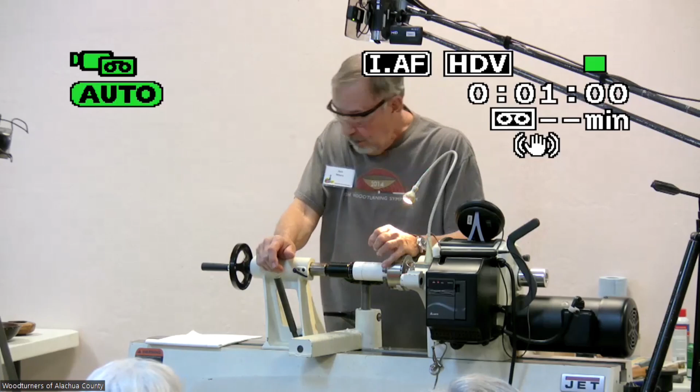All right, we're going to attempt to do some threading tonight. And I'm going to start off by talking to you. When we go to threading wood, it presents some particular challenges for us. There are basically two ways to do it. One of them is with a threader. This happens to be a Bonnie Klein threader, okay?

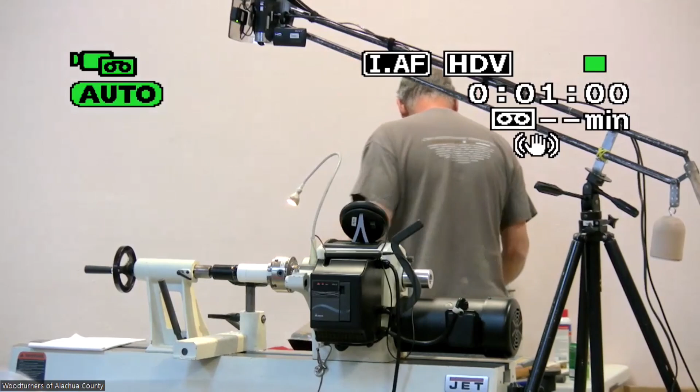And the way it works is it locks here into your banjo, your chuck, which is part right here, goes on here with your piece already turned. It advances here. You dial in your adjustment right there. Also, that's Bonnie Klein. I don't think Bonnie makes those anymore.

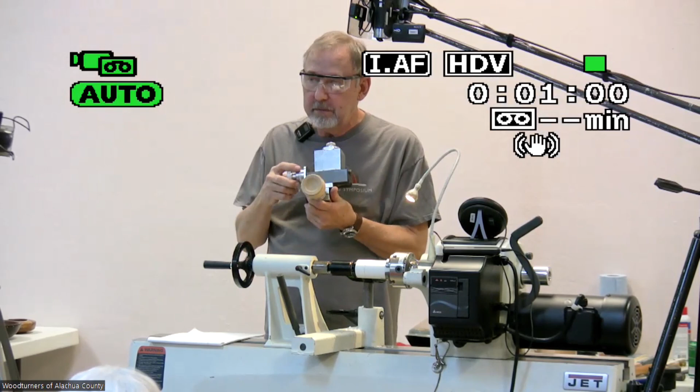This is a Baxter threading jig, which is the one that Don uses. And it's basically the same thing, except Don's got it designed so it sits on a bed lathe. So his is actually a little bit more advanced because he doesn't have to set his up once it's set up like you do. So I'll come back in a minute and explain my personal pros and cons to that way. If you're going to hand thread it, you're going to have the opportunity to buy some more tools. Okay.

It consists of 3 tools. It consists of an inside chaser or a female thread cutter, an outside cutter or male thread cutter, and a relief tool. Okay, and I'll show you how this relief tool works when we get there. My personal thoughts on, well, let me cover these again here. These come in different, as do the jig threaders, these come in different TPI or threads per inch.

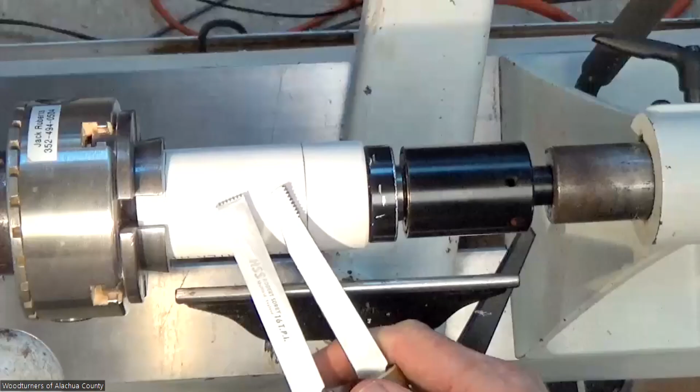Okay, this happens to be a 16. That is probably the most popular. It also comes in a 20. These are 16. Okay. There's also a 20. The 20 is used for really small things like Don showed you these acorn things. Lee Sky makes them about that big, but you can't get a jig threader to go in because it's too small. The cutter bit won't go in.

So, and they also come in either a 12. I've seen 12s and I've seen 10s, and that's generally for big urns or big vessels of some type where you want a big thread. This is the first time I've done this, so I'm going to have to read some notes here. These particular tools are made by Robert Sorby. Okay, they're about, I don't know, $90. This other tool here is homemade. You can buy one from them, and they'll probably sell it to you for about $40, or you can just make one yourself. It's pretty simple.

If you go with a jig type threader, if you can find one used, you're going to pay about $350 for it. If you buy it new, it's going to be between $500 and $600, and that's not all of it. You also have to have a cutter bit that goes into your lathe, and that cutter bit's about $60, and then you got to have a collet system to hold that cutter bit. And what's a collet system? $100, somewhere in that area. So you're going to spend $700 or $800 to do it the other way.

So my pros for the jig threader is that you can turn most all wood with it. You can cut threads in most everything, which you can't do by hand. And we'll see that a little while later. Your success rate with a mechanical threader is generally pretty good from the beginning. Small learning curve, and you're good to go. My objections to them are number one, they're expensive, and I just told you about what they cost. And number two, in most cases, you got a cutter bit. Yeah, well, they're sharp. We won't pass it around.

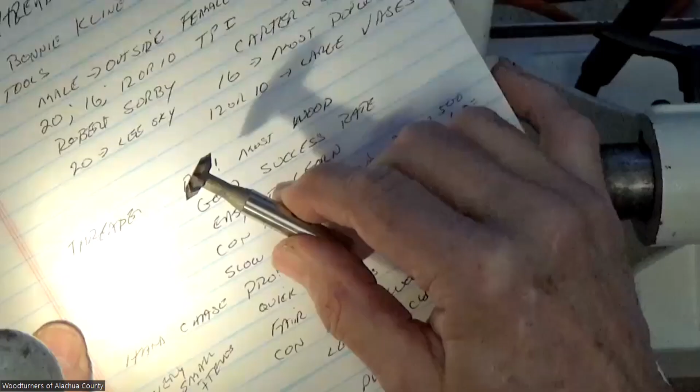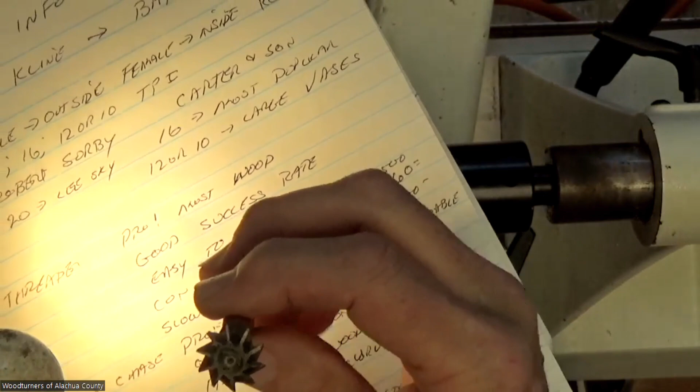Can you go to the overhead? This is your cutter bit. It's a high-speed steel or carbide, depending on what you get. It goes into a collet system, okay? And part of the problem is it's really designed to turn at about 10,000 RPMs, and your lathe's only going to go to about 3,600. So you have to cut really slow with it, or it boogers it up. Thank you, Don. Yeah, router. Yeah, and it cuts a lot better at that speed.

So the things that I have against the threader machines is that they're expensive, obviously. And in Don's case, he's got his problem solved. But in my case, I have to set it all up every time I want to use it. And I set it up on the lathe, and the lathe turns slow.

So sometimes I get a fuzzy thread out of it. And my success rate, I'm sure his is much better than mine, simply because he's got it set up on a router, and it's a router bit.

So if you go to hand chasing, the advantage to them is they're inexpensive. You can get everything you need for about $100. They're quick to set up because they're already set up, ready to go. Your success rate after you learn to use them is fair. I won't say it's absolutely great, because you can get what I call a crumbling thread, which we'll go over a little later. And the bad part about them is it's like a skew. There is a learning curve. And if you're not willing to take on that learning curve, you're not going to be successful with it.

Now, he came up to my house before I even knew him and said, I want to learn how to turn threads. And we sat down, and in about 3 hours, I guess, I had him turn a beautiful thread. Now he's gone home. He tells me he doesn't remember how to do it. I'm glad I didn't teach him how to use a skew. But the learning curve is kind of rough, and we'll see it up here.

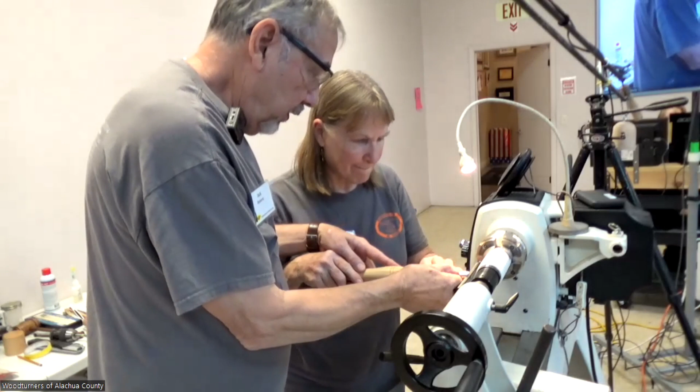Yeah, you're really slow. That's okay. So now I want you to imagine that you're trying to speed up just a little bit, and you're a terrible driver. So when you come down here and you go into turn one and you go into turn two, you're kind of fishtailing and your tool's coming around like that, and then you're straightening up going after there. So it's going to be kind of like this.

Okay. So the same thing. On the third, somewhere in the middle. It doesn't matter. You're going to square it back up. You're going to touch the wall right there with your back end of your NASCAR, and then you're going to straighten it back out. You're riding right down the edge of the wall.

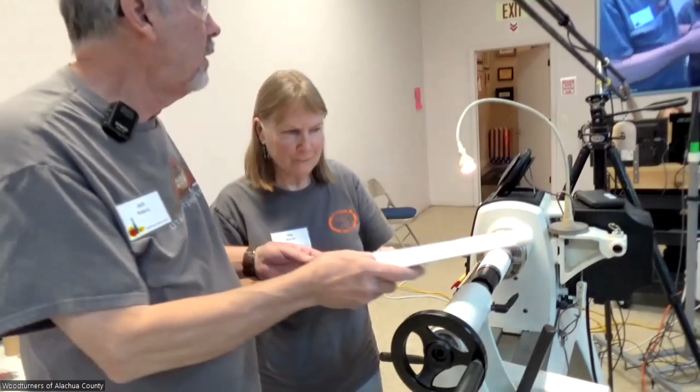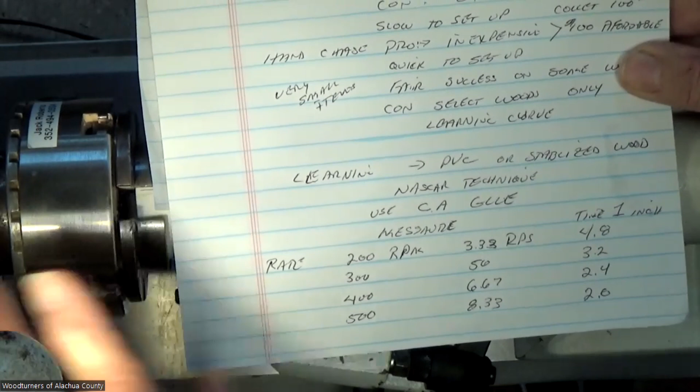Okay, now let me show you something. We on the overhead? Rita was taking about 3 seconds to do that. In my mind, I was timing her. If I turn this lathe on, the proper speed for cutting threads is somewhere between 200 and 500 RPMs. And if you go to YouTube and you watch 4 or 5 of these things, some of these guys cut at 250 and some of these guys cut at 450. The speed you want is the speed that works for you.

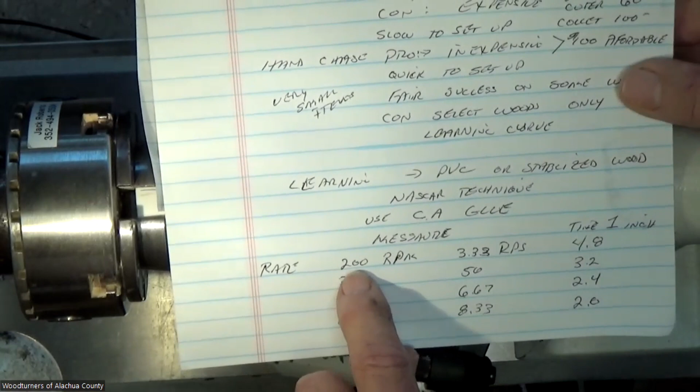Now, Rita will get faster later, but right now she's turning pretty slow. There's a problem with turning at the lower speed around 200, and I'll tell you about that in a minute. If I were to turn this lathe at 16 revolutions per minute, there's 16 teeth in this tool. It would take 1 minute for this tool to go from here all the way to that line right there. That's 1 inch. That's the reason I told her to go to that line. So that would take a full minute at 16 RPMs. We're going to change revolutions per minute to seconds, okay?

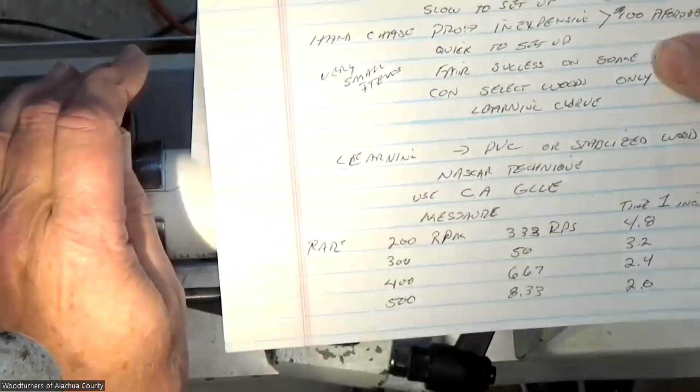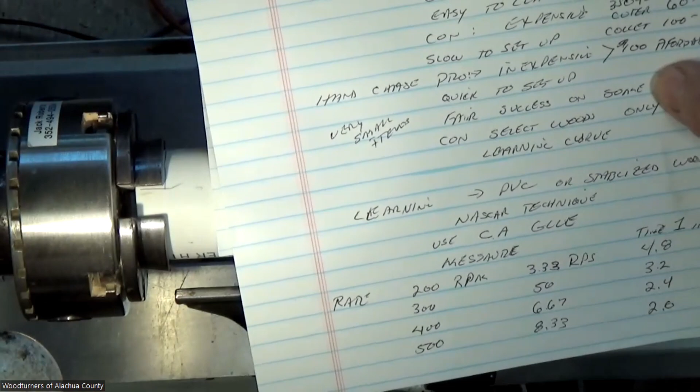So if this lathe is turning, and these numbers really don't matter, I just want you to know where they come from. At 200, that's going to take her almost 5 seconds to go that 1 inch with this tool. That introduces a problem called a drunken thread. You don't get it flowing all the way down. It stops and starts like this. And if you cut one, you'll feel it. You'll feel the tool pulsate when you go through the wood.

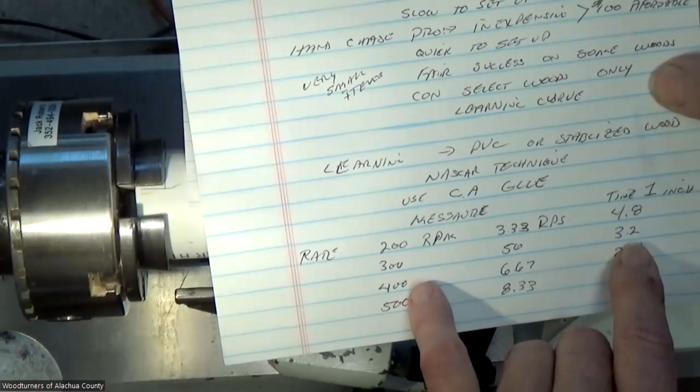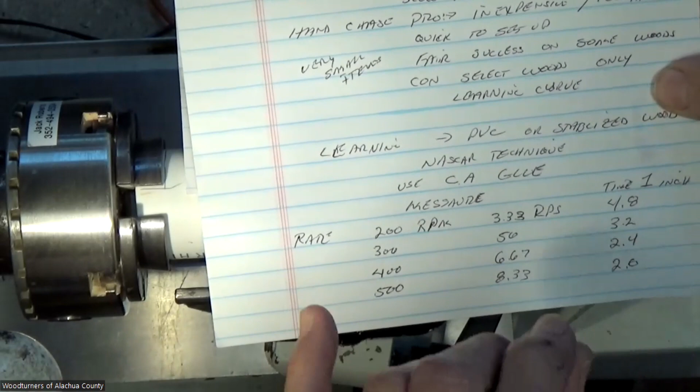You jump it up to about 300 RPMs, and now you're talking about 3.2 seconds. That's about where Rita's at. She's taking about 3 seconds to go down there. So 300 RPMs, maybe just under, would be a good RPM for her to start to learn on. If you get up to about 400, it takes about 2.4 seconds. I turn between 350 and 400. That's the speed I turn at. If you get up around 500, I think you're a little too fast, personally, but I've seen people do it, especially on short threads.

Now, what she's going to turn and what we're going to turn tonight is going to be much harder than turning a lid for a box. And I'll explain this to you now before she tries this. If you go to your pantry, and everybody's got to vote on this now, I want to see some hands. If you grab a jar out of your pantry, whether it's pickles or relish or mayonnaise, and you screw the top off, how many people think this top comes off in 1 turn or less, 360 degrees or less? Raise your hand. I got 3 people, 4 people.

If you think it comes off in 1 to 2 turns, raise your hand. Okay. If you think it comes off in 2 to 3 turns, raise your hand. Does anybody think it takes more than 3 turns? Three-quarters of a turn. 3/4 of a turn. What that means is, to be successful, you notice Don said he had too many, you had to turn the lid off. To be successful, all you got to do is be able to cut 3 threads. Just 3 threads. It'll work like a champ.

Now this is also a little long. It takes 1 1/4 turns to get this lid off. But you look at it, there's 2 threads on the bottom. Now there's more on the top, but there's 2 threads on the bottom.

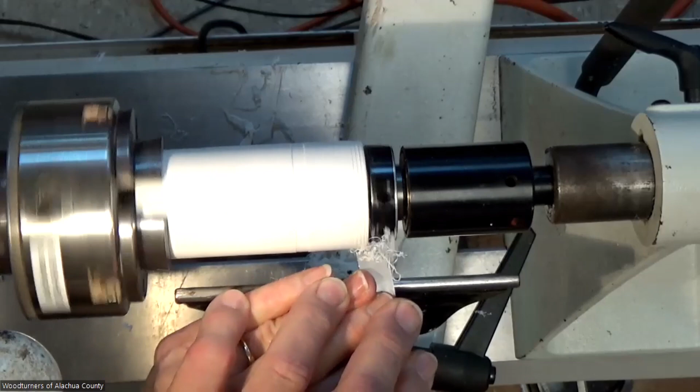All right. Slow it back down. I'm going to give you 275 RPMs. Here's what we're going to do. We're going to start like this. Loosen up. We're going to come down here and we're just going to touch it right here. You got to keep it moving. You can't stop. All right. Now see what you did. You double cut it there because you slowed down. It's got to be one fluid motion. So let's take that off and try again.

So one fluid, don't stop. You got to have the same speed all the way down. Once you get started, very light pressure. Once you get started, it will self-feed. This is the only thing I don't like about turning plastic. Makes a mess. Now that's not straight anymore, but that's okay. Watch me one time, okay?

It's a scraper. It's got to be up. You need to be moving when you touch it. It needs to already be in motion when you touch it. Easy, easy. You're pushing too hard. There you go. Yeah, keep running. Don't let it come on down. All right, let's stop it there. There you go, your first thread. Wow.

Thank you, Rita. That is the technique to get started. It's one fluid motion. Think of it as a racetrack as you go in, and all you're going to do is touch the tool in. Now we're going to go to a piece of wood, and you'll see some of the challenges that come up with wood that don't come up with plastic. Yes, sir. Would it help if you started with something that was already threaded and followed through? You need to learn to track. Yeah, probably. That wouldn't hurt to get that motion started.

The hardest part was that very beginning, when you first start. It's called striking a thread. I had to remember the word, striking a thread. And once you get 2 or 3 threads on there, you're good to go. Now, if you're doing a box, you'd want to actually turn about 4 or 5 threads, because in the end, you want to get rid of those first 2 or 3 because they're usually not as good as you want when you finish.

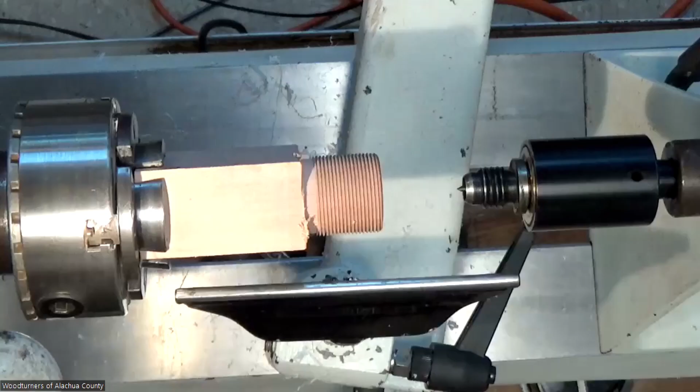So I've got a piece of dogwood here, and I practiced on it a little bit. We're going to put it in here and turn it down. Now, normally, if I were turning a box, I would do this differently. I would thread the female thread first. I would turn inside the lid first, and then I would fit the outside thread to that. The reason is because the outside thread is easier to manipulate than the inside thread.

So I would establish what my inside thread is going to be, and then I would cut my outside thread to fit it. I found when you start doing these long bolts, that doesn't work at all, actually. It's very difficult. And the reason is because the inside thread is the hard one to get correct.

And once... does somebody have a bolt back there? Somebody just tossed me one of those bolts. Just throw it up here.

If I turn this piece first and I don't get it perfect, it doesn't matter what I do down here, it'll never fit right. But if I turn this piece perfect first, I can see it. I can put a micrometer on it. I can measure it. I can make sure I don't have a drunken thread on it. And then I can turn this piece to fit this piece. And I found it's much easier to do it that way. My success rate went from 50% to like 90%.

All right. So we got a piece of wood on here. If we're going to turn the outside, we're going to turn the bolt part first. We're going to drill the nut part.

Is that box still going around? Yeah, don't worry about it.

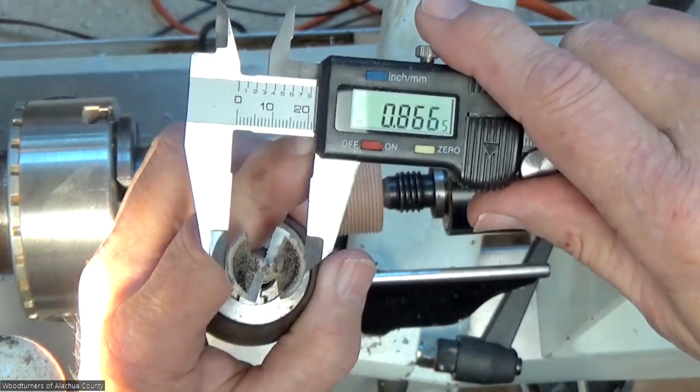So we've got our 7/8 drill bit we're going to use. And I'm going to mic it, and it should be 0.875. No, I don't think so. These drill bits Jason recommended are not very accurate. There you go. All right, so you see I have 0.866. Okay, I'm going to assume that it's actually going to be 0.875.

So what I'm going to do right here is I'm going to add to this 50 thousandths of an inch. That's going to bring me up to about 0.92 right there. Okay, that's the diameter that my bolt should be. And if I lost you, show up Saturday and I'll explain it to you again.

Okay, so we're going to turn this piece, and it has to be symmetrical. It has to be parallel. It can't go wobbly, wobbly, wobbly. It has to be true, or it's not going to thread very well. So I'm going to bring this down for that caliper to fit.

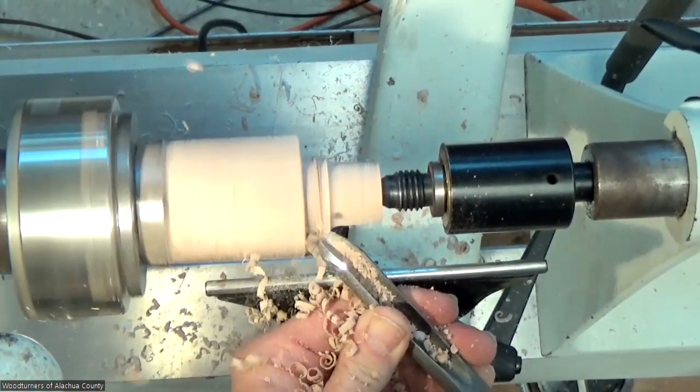And no, Paula, I'm not going to wear a shield. Paula's a safety person. But I will be careful. Frank's not going to wear a shield either. Close.

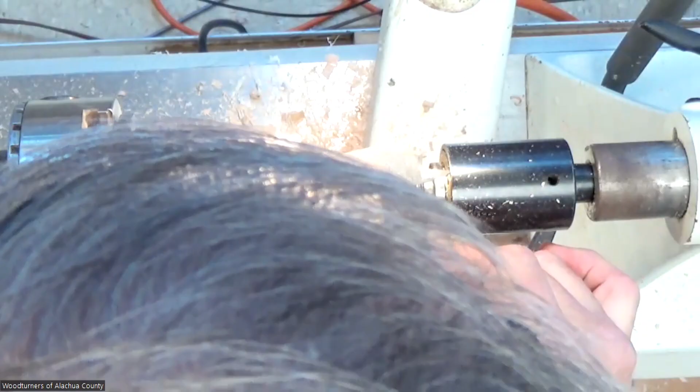All right, it gets a little bit fat right there at the end. See that? I'm good right here. A little bit right there at the very end. I'll touch that, and we'll move on. Yeah, I can. Right after I get it.

So here's my caliper set up, and there it is all the way down. Gets a little bit bigger right here at the end. Actually, it's got a hump in it right here. It's just a little bit high. So I might as well go ahead and take that out. Right here was just a little bit high.

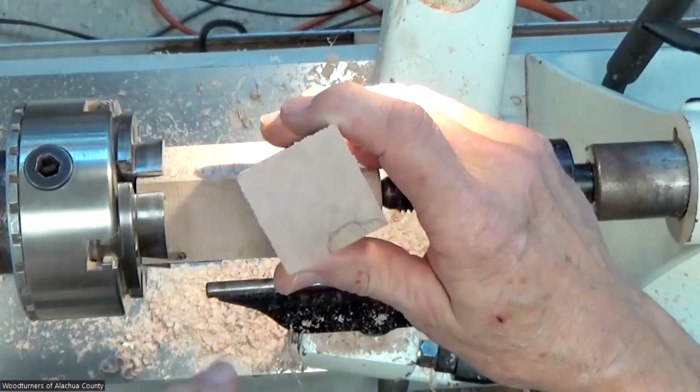All right, that should do it. We're going to thread that. Now, I'm going to attempt to thread this without using super glue. There are two things you can do. One of the problems you have is what's called a crumbling thread. And a crumbling thread happens when you're turning a piece, overhead please, and you see the grain right here. I don't know if you see that grain right here.

When you get to this side grain right here, it wants to tear it out. It's not attached to the wood where the grain is, so it wants to just peel off a chunk. And if you looked at those coming around, you saw a spot there. And if you looked on the other side, 180 degrees, there's probably a spot on the other side. Super glue helps relieve that problem as you go along. And we may need to use it. If we do, I will. Yeah. But it presents other problems too.

Okay. Part of the problem that you don't realize is that this threader that I'm fixing to use is 16 TPI. Okay. But each one of those is a triangle, so that means each side is 1/16 of an inch. So this is a scraping tool. When I stick this tool in this wood, I'm actually sticking a scraper in there that wide. Now, if you've ever stuck a 1.5-inch scraper inside of a piece of wood, you know that it has a tendency to grab things and tear them apart. And that's part of the problem.

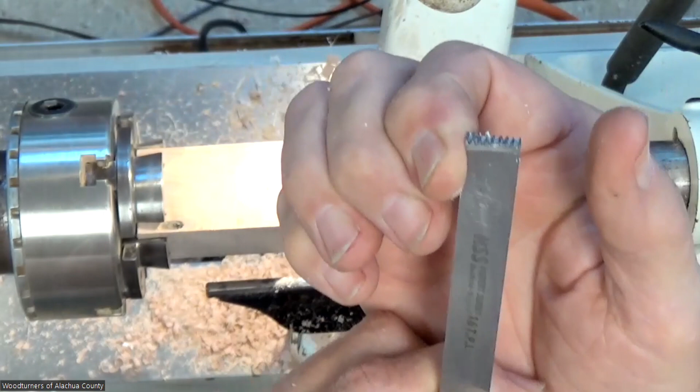So one of the things you can do is sometimes you can try a little soapy water. I did not find that worked really well for me because it wants to swell the fibers up. Some people use it. Another thing, and we may try it before we try the super glue, is some beeswax. I got a little beeswax back here in an emulsion that's softened it up. That'll help the tool slide through a little bit better.

The last thing you want to do is use super glue, and you don't want these threads to come to the same point this is. If you let them come to a point, it's going to tear them out. They're going to be threads that are kind of flat at the top. They're going to kind of look like pyramids with the top knocked off of them if you look at them through a microscope. So let's see if we can get this thing to thread. I'm going to dial this down to about, now, that's a good speed, 364, okay?

Need to raise my tool rest. The scraping tool needs to be at center or just slightly below. The handle has to be up. I'm going to do my same rotation here, and I'm going to come in here and try and strike a thread. Now, one of the things I'm doing, if you'll see this lead tooth right here when it comes in, that lead tooth is not touching. And I will not let it touch the wood until I've got a complete thread down it. Then I can let it touch. If I let it touch before I get the thread all the way to this relief, it's going to rip all these threads out. It has to stay in motion.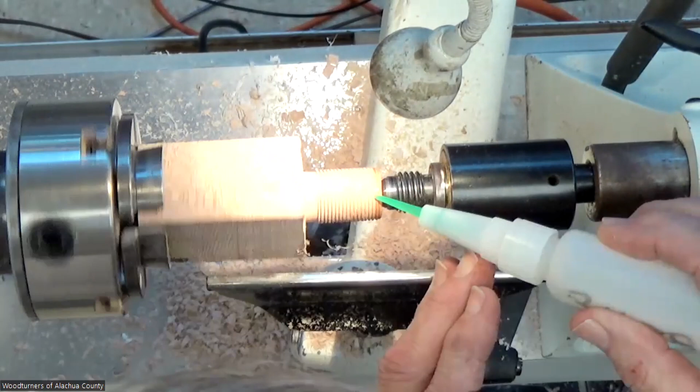I put a little super glue on it. Huh? Yeah, okay. I have to see too. This is the thin super glue. This is the 3408, which is the stuff that doesn't smell so bad.

Why do you ask me these questions?

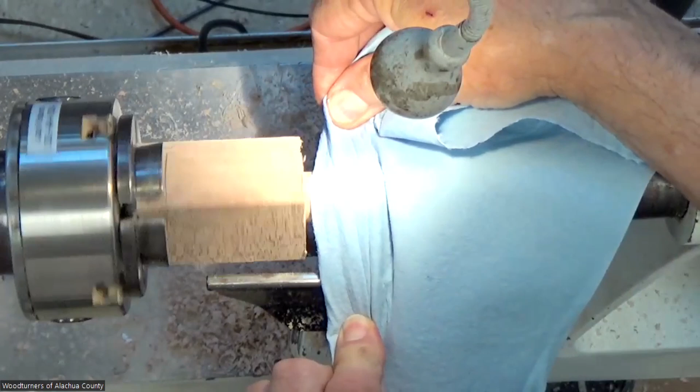You got to then wipe some of it off. If you don't wipe it off, when you hit it with accelerator, it all foams up and you got a mess. Don't wipe it off with your finger. It's great. Oh.

And we thought, oh, great. And he looks a minute and he goes with that accelerator again, and people started getting up and leaving. Now, Scott and I were stupid. We just sat there and choked. We didn't leave, but we should have. So I try to be mindful that this stuff does smell bad.

Okay, I'm coming back up to my speed again. I got about 390 on here. It's going to start turning kind of rough because it's super glue. So I want to have a really light touch. I don't want to tear anything up. So hold the tool very lightly. Please hold it down. See the super glue coming off?

If it comes off and it's not nice and flaky, like somebody just mentioned, have you a stainless steel brush and brush it off before it gets good and hard, and it'll come off really easy. All right, let's go back to cutting this. That's a pretty good looking thread. I think we can put a nut on that.

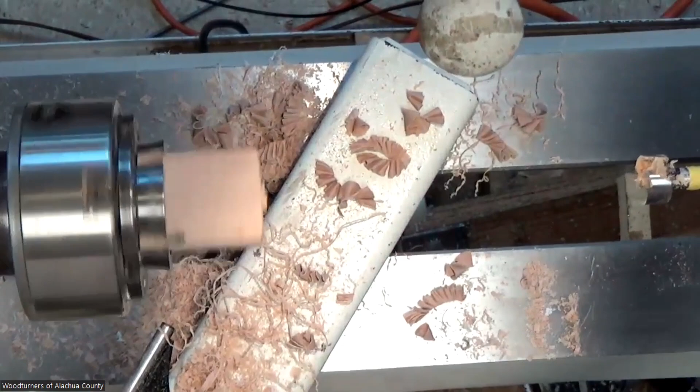I'm gonna put, that's about 3/4 of an inch. I know that because that piece of tape's on there. And that should be plenty. So we've turned our male, we threaded our male side. We're going to thread our female side. We're going to do what Don just said, only on this part. We're going to put a little chamfer right here on the edge to get the tool started. And I think the easiest thing to use is just

All right, Don, there's your edge you were talking about. It only has to be one tooth wide. Okay. All right, now, when we talked about a relief, if I go down through this hole with this female chaser, I've got to be able to get it out. If it hits the bottom of the hole, it rips out all the teeth, all the threads that I've cut. So that's what this tool does.

Where are you? Oh, go to, okay.

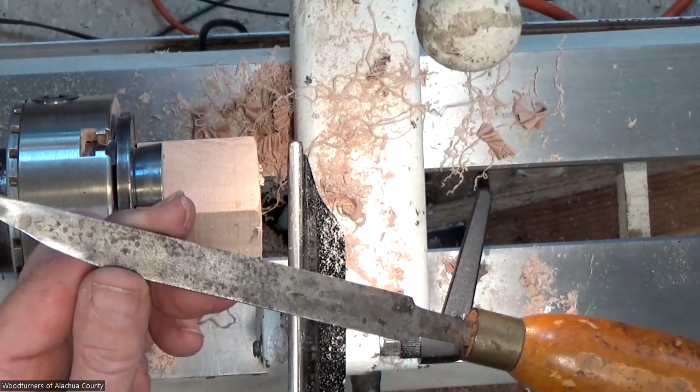That's what this tool does. It's got this little hook on the end. It was made from a scraper. If you folks ever have a chance to buy old tools like this, you know, you get them for $5 somewhere, buy them because you can turn them into decent tools to do other things with. I got a bunch of them that I've made into other things.

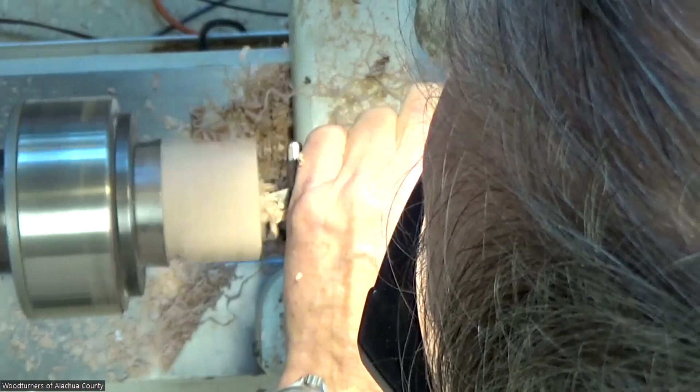Now, I want to go in. I want my nut to be about 3/8 of an inch wide. That happens to be that little mark right there, if you can see it. That little grind mark right there. Turn it just right. That's 3/8 of an inch. I'm gonna go in about 3/8 of an inch right there. And I'm gonna go to that till it won't go anymore. Now that should give me enough room to get in and out.

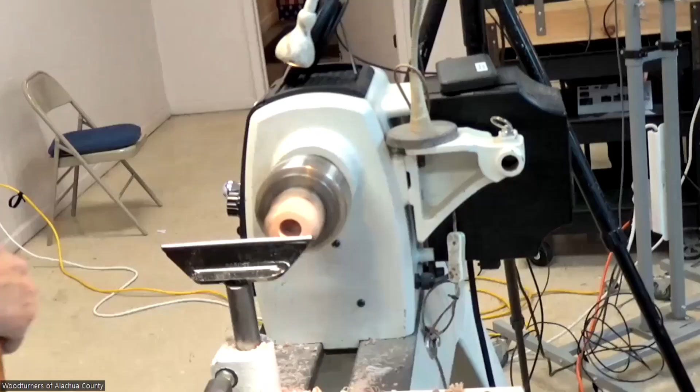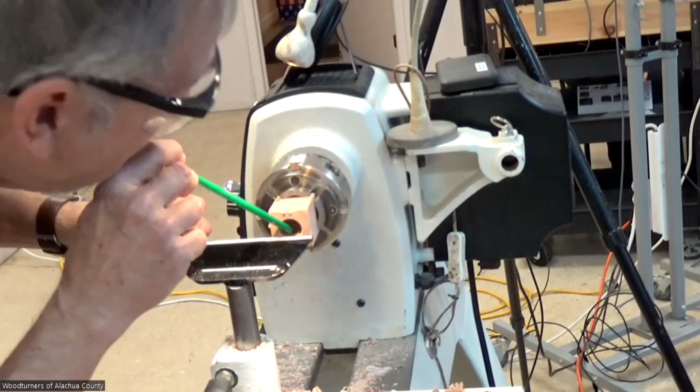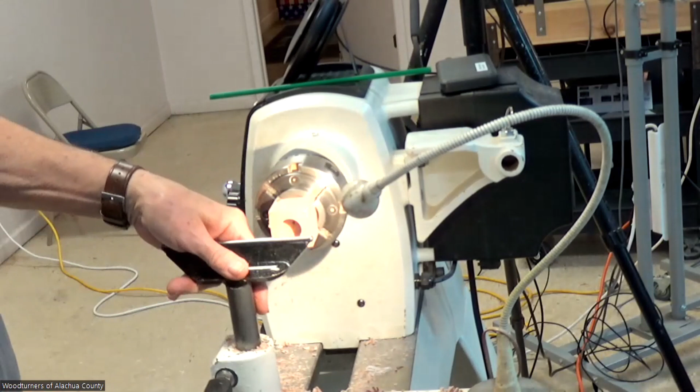And I got a very expensive tool here. Remember, blow. Get my light up here. Okay, I'm gonna do this one. Same way, I'm gonna put this tool where it strikes at the center or a little bit high. A scraping tool, no, I've got one here.

That's okay. A scraping tool, to work, has to be at 90 degrees to where it's touching or less. If it goes this way, who knows what that's called? A catch, a major catch, okay? When you're on the outside of a piece and it's rolling to you this way, that means this tool needs to contact the center of the piece or just below the center of the piece. On the inside, it's coming at you this way. The tool needs to catch at the center of the piece or just slightly above the center of the piece. That way you don't get catches or you at least minimize them.

All right. We're going to go back to our same speed that I had before. 382, that's what it hit at. Close enough for me. Now, before we did the NASCAR thing, now we're going to do the anti-NASCAR thing. You got to learn them both. We're not prejudiced here. We learn them both. Okay. All right. Same process. I'm going to come in here a little bit crooked. And then as I establish this thread, I'm going to roll this handle around and straighten it up.

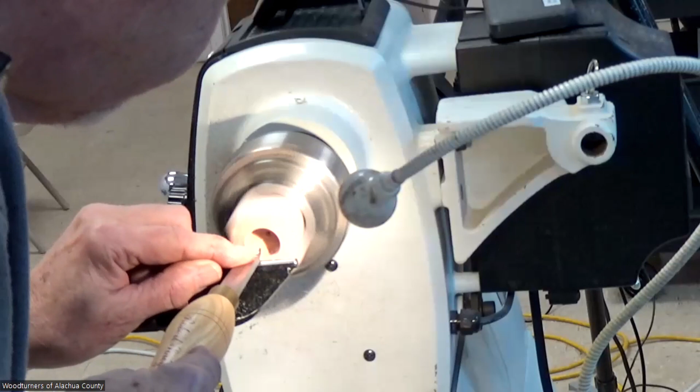Inside threads tend to crumble less than outside threads, and I don't know why. It seems like they ought to do the same, but they don't. The inside holds a better thread. Now I've got a drunken thread. You see how it's jumping on me? It may or may not work. Since we're there, we're going to keep going. I'll try and straighten it out a little bit with a little pressure.

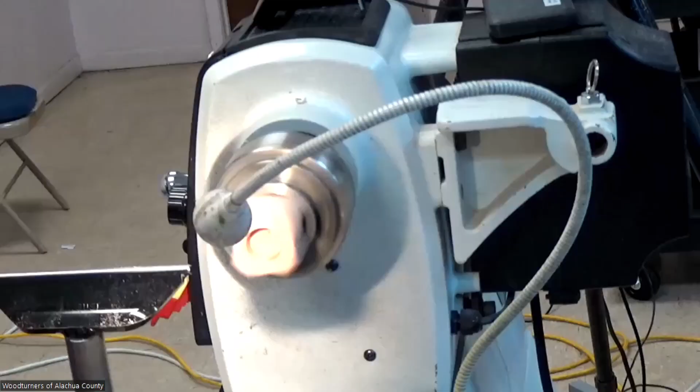I can tell it's not going to fit yet, but it's getting there. Let's put a little super glue in it so that I don't tear it up. Try not to stick your fingers into turning things. Give that just a second. Anybody have any questions so far, or have I lost everybody?

Yeah, occasionally you do, and all you do to sharpen it, I don't know if I brought a, I meant to bring a sharpener, but I think I left it laying on the table. All you do is just turn it flat on a diamond stone, do a little circle thing like that on your diamond stone as flat as you can get it, and it just brings the teeth back. You may can see. Can you give me the overhead? You may can see it right there where I've sharpened it. See how the light hits it.

And if you look at this other one, it gets used more simply because I practice with this one more, because it actually gives me more problems. You'll see it right there where it's been sharpened, right on the very end. So, all right, let's see if we can finish this up here.

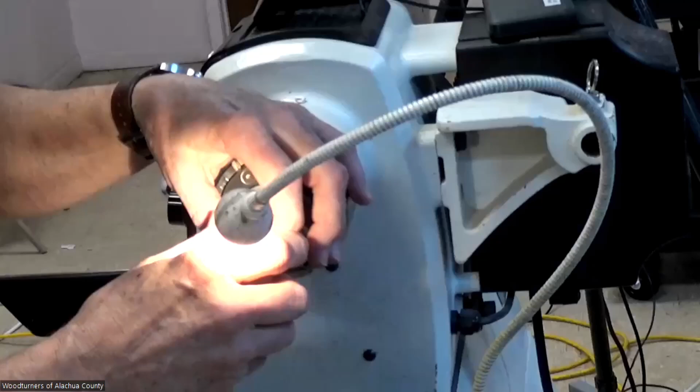That's the reason I do this piece first. You see how it tightens up? That looks like a good thread. If I were to part that off and then turn this piece, I'd never get it to fit right because this is not done correctly yet.

At this point, is it because your threads aren't parallel or because your diameter isn't correctly matching? Yeah, one of those. One of those.

Not quite there, and it wants to cross thread just a little bit. That's another problem that you have with them. You have to be careful. You get them established good. There it is. And it's threads off just a little bit. Let's super glue it and run it one more time. And maybe that'll do it.

Be careful to remember to slow your lathe down if you're super gluing on the outside. Doesn't matter in here. You want to know how I know that? Oh, yeah. Let me get this drying and I will.

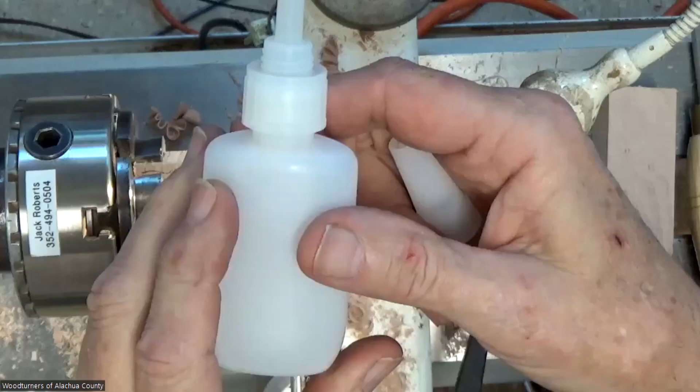So this is thin super glue. It's 3408, which is the kind that doesn't smell quite as bad, takes a little bit longer to set. And it comes with a rather aggressive cap on it. Okay. And I don't want to take it apart, but you can buy these little additions to it. The problem is when you screw on, thank you, Frank. There's the cap that comes with it. And it's got a big hole and it's too big to get in tiny places.

They make these little, Paula sells them. It's a bunch of little tips, and the little tip will slip on here. But it may not stay on there. And if you're down there doing this and you mash it and it comes off, you got a big mess. So what I do is I put the tip on here. I take some electrical tape and I tape around it so that it doesn't leak.

I take this cap, I drill the inside out, I think with a 1/4 inch drill bit, and I screw it all together just like that. Now it won't come apart. You just put a piece of tape over the top. It's much more user friendly that way.

I found out the hard way when the bottle I put it in later blew up and had 4 ounces of super glue on my hand. Oh, I forgot about that. Yeah. My recommendation is hot water and 60 grit sandpaper. I totally forgot that. See, that's the reason you come to meetings, to know that you're not the only person that screws up. Yeah.

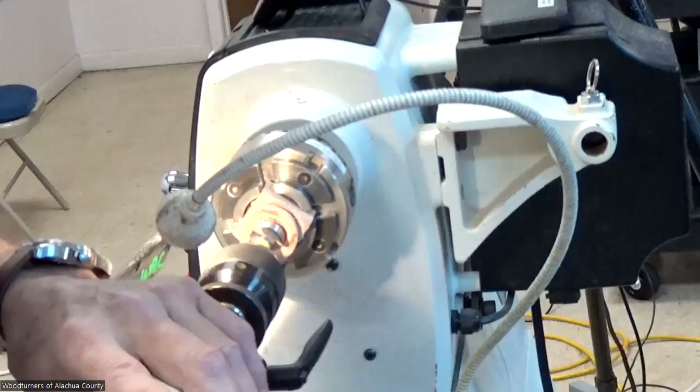Oh, I didn't drill quite deep enough. Hang on. Can't get this close and not have success. Yeah. I should drill just a little bit deeper. And I would have had the washer for it. I don't think I'm gonna get that out here.

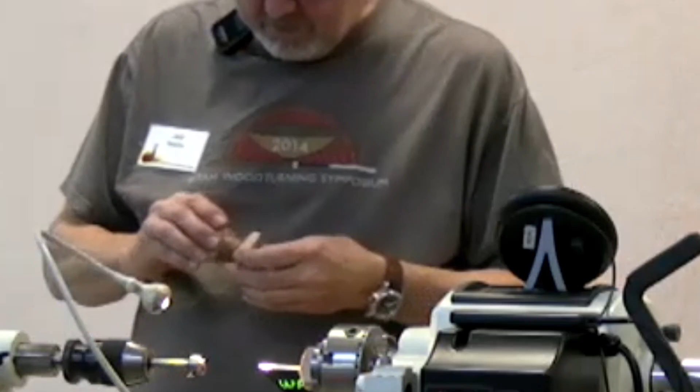Anybody have questions so far? What am I doing? I'm using this design opportunity to fix a screw up. Okay? Yeah, they're actually pretty strong. How to keep ashes in. Yeah. It's a little tight. Polish it up a little bit. And you didn't get a washer because I didn't drill it far enough the first time.

Now, this may be one of those things that you learn how to do just so you can say, hey, I know how to hand chase threads. Right, Admiral? Yeah, and it may be something you want to utilize, you know? I went through that. You weren't paying attention. Shame on you.

That's it, folks. Next month, we'll have somebody that'll do something much more simple, but how long does she spend doing those, Don? Or Don Penny? How long does Tracy spend? Yeah, playing with them. So it's interesting.